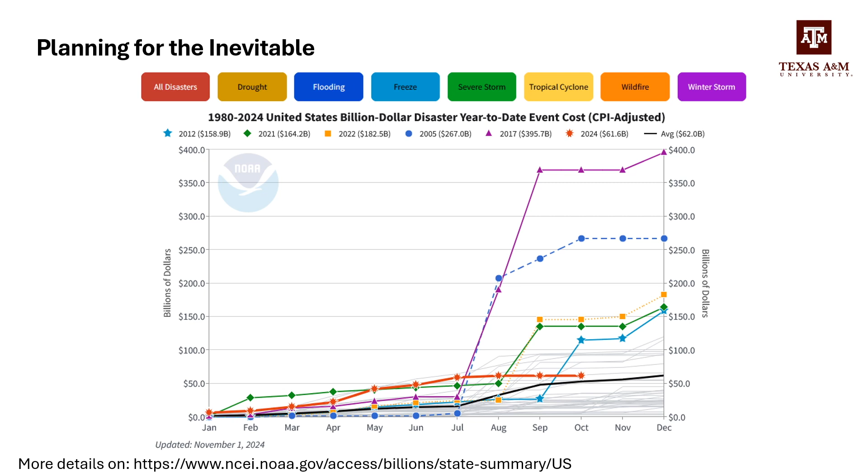This is largely driven by a combination of factors: population growth, urban development in highly vulnerable areas, but also climate change, because climate change intensifies these extreme events.

Given that our focus is on industrial processes and the impact of disruptions, if you consider a region like the Gulf Coast, which is home to numerous industrial and manufacturing facilities, this is home to close to 50% of total petroleum refining capacity, as well as 50% of total natural gas processing plant capacity.

The reported economic losses exceed $550 billion, but it doesn't really capture the full extent of devastation when it comes to the environment and to society.

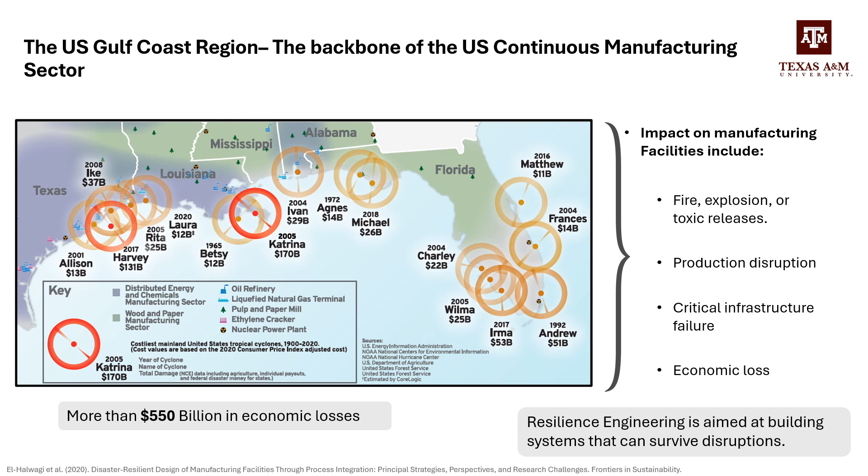Now, these disruptions are always going to happen one way or another, and the primary reason is how interconnected and interdependent our world and industries are. Something happening in a distant part of the world will ripple and find its way to your city or business or industry in general.

Now, these interdependencies have been studied extensively, specifically in the critical infrastructure domain, and this is where I borrowed the chart you see on the right. They are mainly categorized into physical interdependencies, so you can think about the material exchange between two entities or facilities. For instance, in the chart, you can see natural gas supplying a power plant with fuel for generators. There's also cyber interdependencies, anything that involves the exchange of information.

You can also think about geographical interdependency, so maybe there's no physical or cyber interdependency, but there's a proximity of systems. This leads to the fourth category, which is logical interdependencies, where you can infer a relationship. For example, you can be in a country where some regulatory or policy change

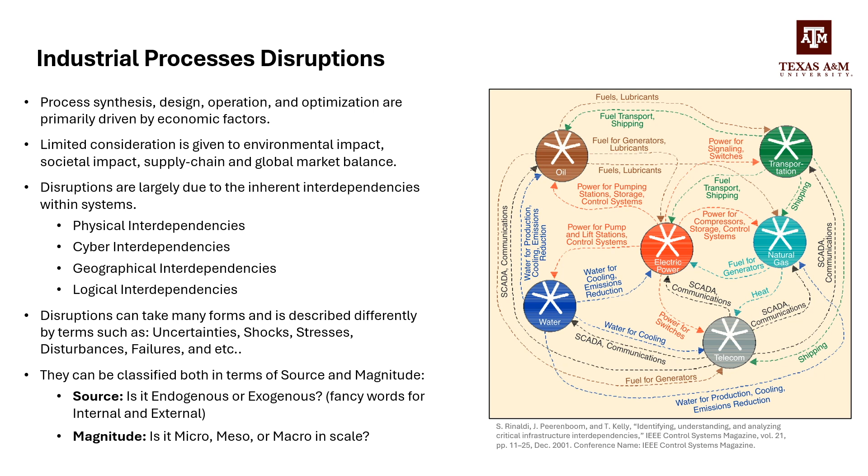So resilience, which is a concept and can be described as a property of systems, is really multifaceted and multidisciplinary. You can look at it from an etymology perspective, or from a modern usage perspective, which usually defines resilience as the ability to cope with stress. But you'll find different definitions depending on the context or discipline you're examining, and resilience theory seeks to give a unified framework.

However, the concept is deemed by many as somewhat abstract, elusive, ambiguous, and because it depends on the system itself, like the system ontology depends on how you define the system boundaries, and whether your system has the ability to self-organize, it makes it really hard to give one universal definition.

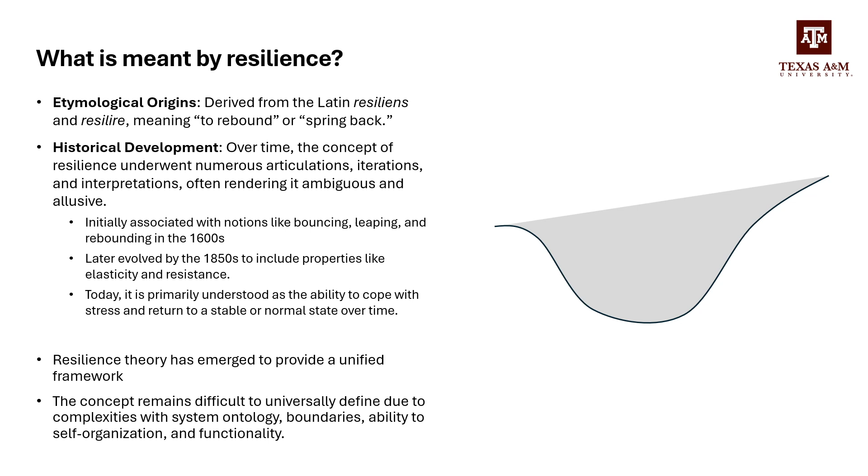However, one of the important things in the resilience literature is that it is visually represented through what is known as a bathtub curve. In the bathtub curve, you have the x-axis as time, and on the y-axis some performance metric that reflects the overall health of your system, be that production capacity or maybe revenue from sales.

So you can imagine your process or system is working as intended, and then something bad happens which causes your system to fail partially. You can think about this disruption as, for instance, a major equipment failure. Then naturally, there will be a response from the operational team to restore the process, and this will take time until the process is returned to normal operation.

Now, the dip or depth of this bathtub highlights how resilient your overall system is. Of course, it's not necessary to restore the performance to the original level, so it can be a repurposed performance that could be higher or lower than the original one, and it can also be allowed to fail safely if that's the case.

You can categorize phases around this disruptive event into three phases: a pre-disruption phase, a post-disruption phase, and whatever is in between, where your operation is not working as planned due to the disruptive event. The bathtub curve is a great way to show the life cycle of a system.

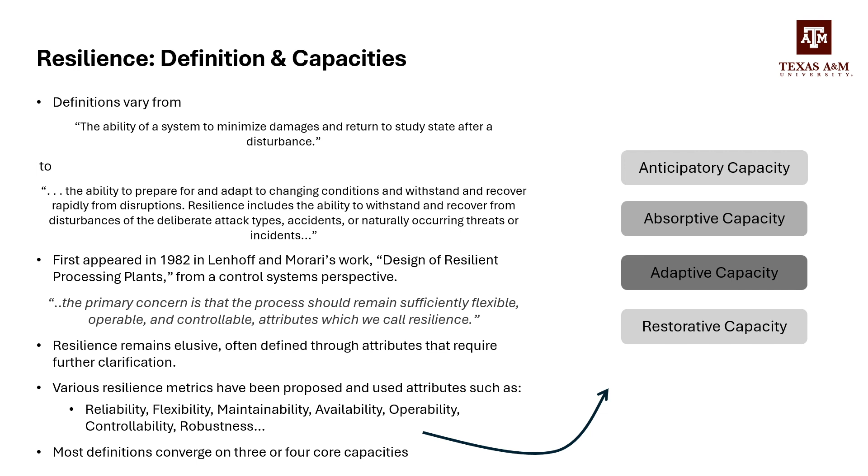If you look at the bathtub curve, we can see these capacities during the different phases. In the pre-disruption phase, we can anticipate potential upsets. This can be early on during the conceptual design phase or during a retrofit phase. What this really means is that in this phase, we can be proactive and have proactive strategies to prepare for potential disruptions.

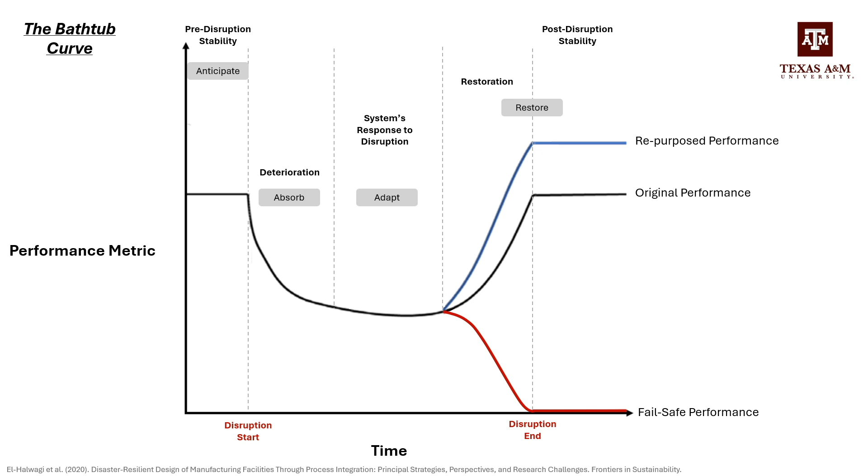Then when a disruptive event happens, the system should not fail immediately. In other words, it should absorb shocks. Then it should be controllable and can adapt to the changing conditions. In these two phases, you can also employ concurrent resilience strategies that focus on maintaining functionality during the disruption phase. Then, reactive strategies are implemented in the post-disruption phase to restore the system to a stable state.

So now that we know a little bit about resilience, how do we include it in the design of industrial processes, whether during the conceptual design phase or during the retrofitting phase? Noting that the inclusion of resilience is really most impactful when addressed early on, where you have more degrees of freedom, as compared to the retrofitting phase, where technical difficulties along with financial ones usually arise.

This way of thinking, including resilience early on, parallels the concept of inherently safer design, where safety is considered from the outset. Some of the charts I've shown till now are borrowed from Dr. El-Halwagi's paper, in which he suggested 12 disaster resilience principle strategies to enhance the resilience of manufacturing facilities. I have it on the last slide under suggested readings, but you can see the 12 strategies here, and you'll find more details and examples when you go through the paper, which I encourage you to do.

To take one example, let's look at the repurposability strategy, where it simply refers to the capability of a process to be repurposed to produce different products from the original intended ones. You can look at, for instance, the block flow diagram that shows natural gas and oxygen being used to synthesize methanol. Now, as many of you witnessed during the pandemic, the demand for hand sanitizers went up the roof.

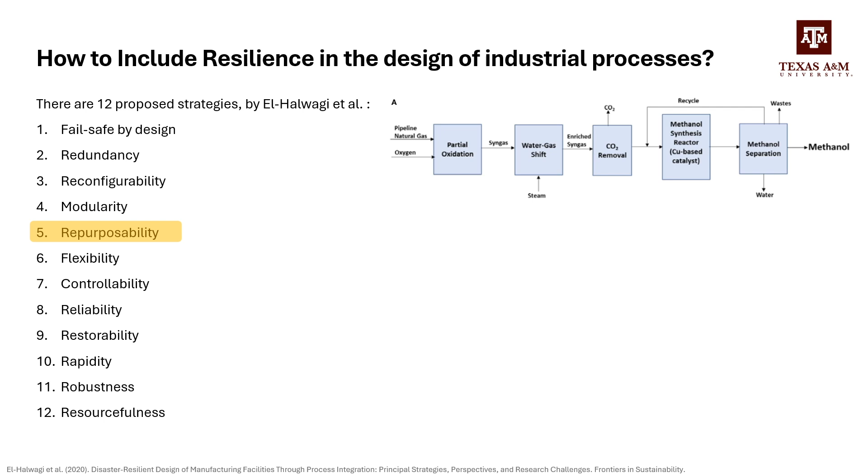One question that may come to mind: can methanol be used in some way to manufacture hand sanitizers? Well, the answer is yes, but how? The process of methanol can be repurposed, given certain requirements or constraints being met, to produce ethanol, which can be used to manufacture hand sanitizers. If you look at the second block flow diagram, the process is almost identical, except for the apparent change in catalyst.

Of course, there will be changes in terms of vessel capacities and some other design parameters, but the idea that the methanol process may be repurposed to produce a different product is worth considering during the conceptual design phase, where one of the steps is usually looking at the different processes and evaluating them. Being resilient aware will highlight such processes.

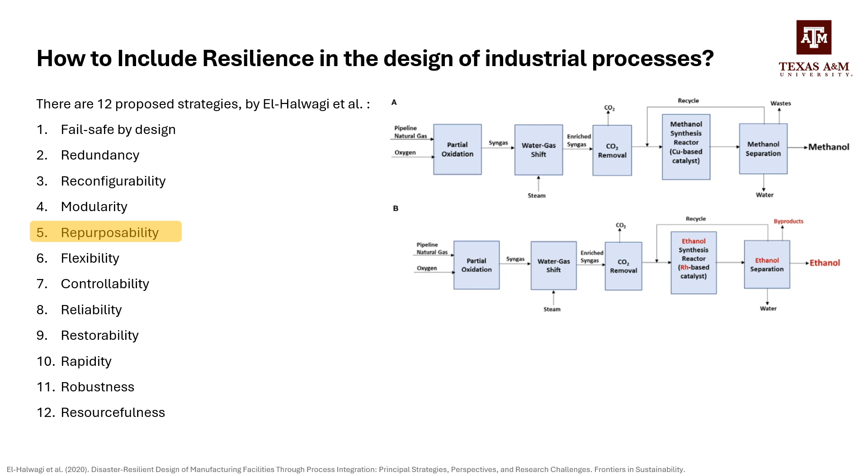You can also see an example that actually happened back in 2020, where some wine and beer distilleries repurposed their process to manufacture hand sanitizers for their local communities.

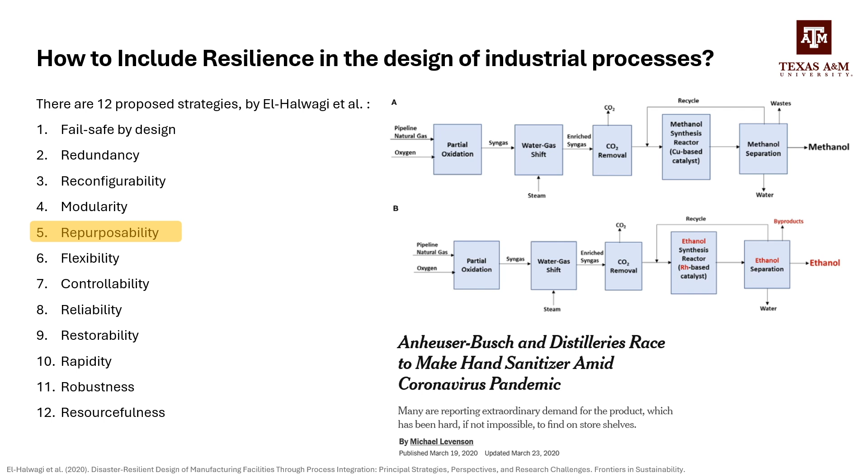So we talked about resilience, what it is, and we highlighted that it's important to be aware of disruptions that arise from unavoidable interdependencies, and how important it is to include resilience in the conceptual design phase, just being resilient aware. One interesting example is industrial symbiosis, which, from the name, draws inspiration from nature, like many other innovations. Just to refresh your memory, symbiosis is basically any beneficial mutualistic relationship between two entities.

One example of mutualistic symbiosis can be seen between the oxpecker and the impala, where the oxpecker feeds on parasites and ticks found on the impala, while simultaneously improving the impala's health, because these ticks and parasites feed on its blood, which would make its health deteriorate if it weren't for the oxpecker.

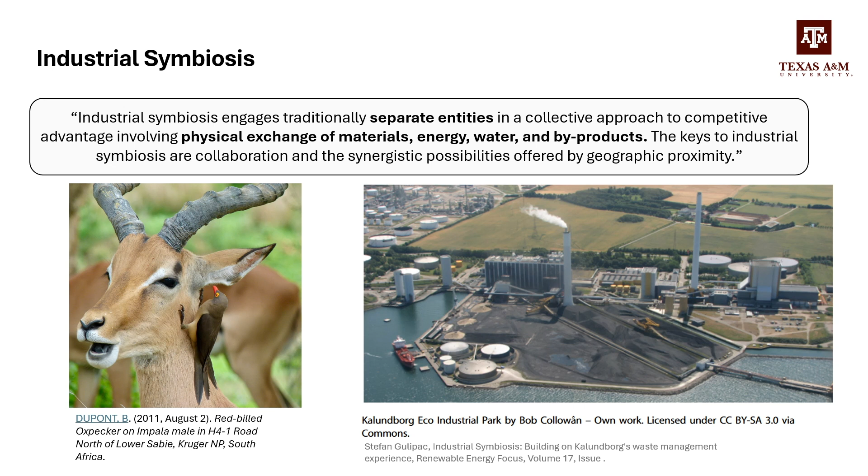This relationship is mirrored in industry, where separate entities engage in a collective approach through the exchange of materials, energy, water, and byproducts. You can see this in one of the well-known industrial symbiosis networks, also termed eco-industrial parks, in Denmark, showing the industries involved and the type of exchanges they engage in.

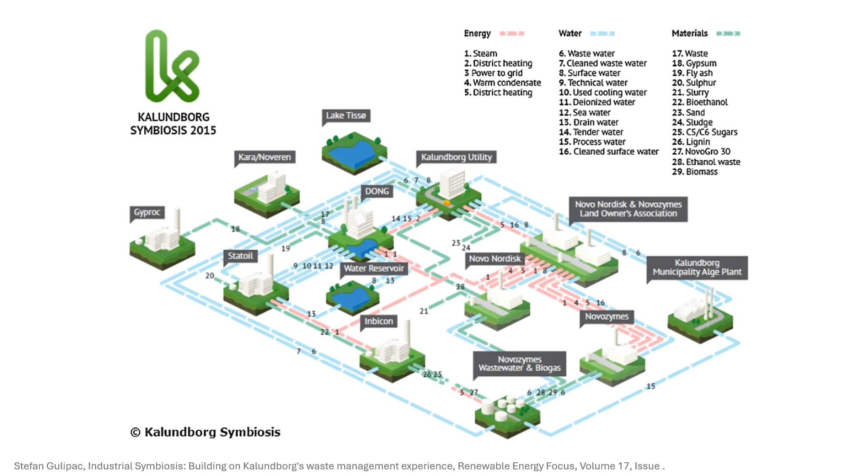You can find similar examples across the globe, including in the United States, South Korea, China, and various parts of Europe. You'll find eco-industrial parks, or industrial symbiosis networks generally, that have more than a thousand facilities exchanging products of all sorts.

Here you can see an example of an intriguing conceptual model for an industrial symbiosis network: the carbon, hydrogen, oxygen symbiosis network. As the name suggests, the exchange components primarily contain carbon, hydrogen, and oxygen. What sets this model apart is its introduction of an interception network, which includes interceptor units. These units go beyond the simple material exchange found in many existing eco-industrial parks by transforming, mixing, and separating components to meet the specific demands of participating facilities.

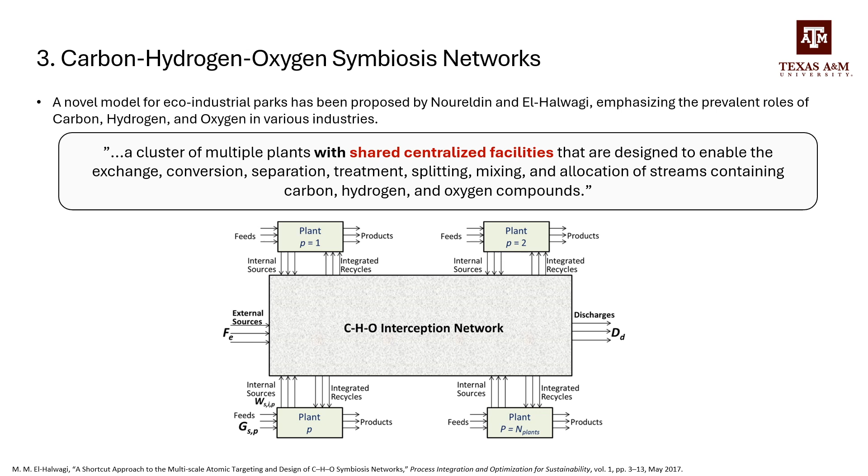For instance, if a plant requires methanol and none of the other facilities can supply it directly, then an interceptor unit, such as a methanol synthesis unit, can produce it to fulfill the need.

All industrial symbiosis networks, exemplified by existing industrial parks or eco-industrial parks, are driven by profitability like any other business or industry. However, this is achieved by sharing infrastructure that allows maximizing resource efficiency or resource utilization, while reducing environmental impact and delivering societal benefits. So this idea of co-locating and maximizing resource utilization for economic advantages is appealing. However, it does come with a cost of being highly dependent on other participants to operate.

The reason I took this detour to discuss industrial symbiosis is that I find it fascinating, and also it's a microcosmic representation of the global interconnectedness we live in. It's like a condensed model of how the world's interconnections function. You can see the effects ripple through the systems at a much faster rate.

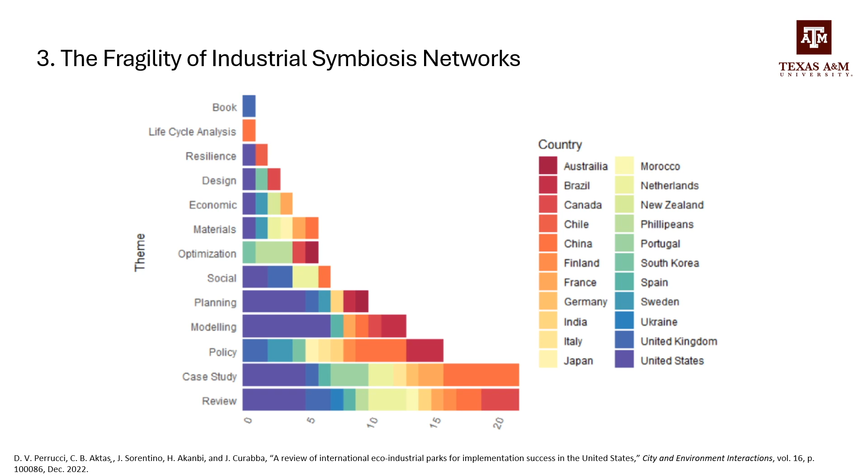Also, part of my reasons is that this is what I worked on during my master's thesis, which we will see on the next slide.

So the case study is to examine the resilience of a carbon-hydrogen-oxygen symbiosis network, which was synthesized based on economic metrics. But the overall framework can include any type of network that can be represented in a node-arc representation, which is all what networks reduce to.

You either start with an existing network implementation, or you use targeting techniques or mathematical programming—two techniques covered, I think, in chapter 11 of Dr. El-Halwagi's book. You use these to synthesize a network based on a postulated set of available resources and desired targets. Then the synthesized network will consist of nodes and arcs.

The nodes represent facilities and plants. The transportation arcs can represent streams, for instance, or shipping routes. Then after doing so, we assign a degree of dependence between two nodes, which is basically a percentage showing how a receiving node's output is affected by a disruption on the sender's node.

In other words, if node A gives node B 1,000 units of something, and node B is 10% dependent on node A, then node B's output will be reduced by 10%. You can see the propagation mechanism in the top right corner.

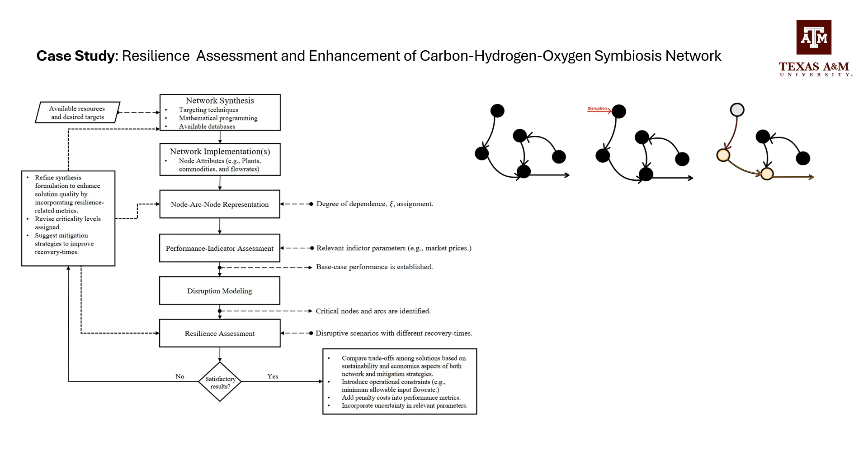Then in disruption modeling, each node in the network is disrupted individually, and we see the effects after the disruption happens—in other words, after the failure is propagated through the network—and then we can identify the critical nodes and arcs. The last step in terms of assessment is postulating different recovery strategies so that we can calculate resilience.

Now, of course, after doing so, if the result is satisfactory, in other words, you deem the network to be sufficiently resilient, then there are other trade-offs you can consider. You can make the analysis more rigorous, and you can enhance the overall analysis. If the network is not resilient, then you can go back and refine, for instance, the synthesis formulation.

So we talked about how we synthesize the network in targeting techniques or mathematical programming. You can choose different metrics other than the economic metric. You can choose something that reflects resilience, if you can express it mathematically. And you can synthesize new networks, and then you can examine the resilience, or you can revise the degree of dependence that you assign between the nodes.

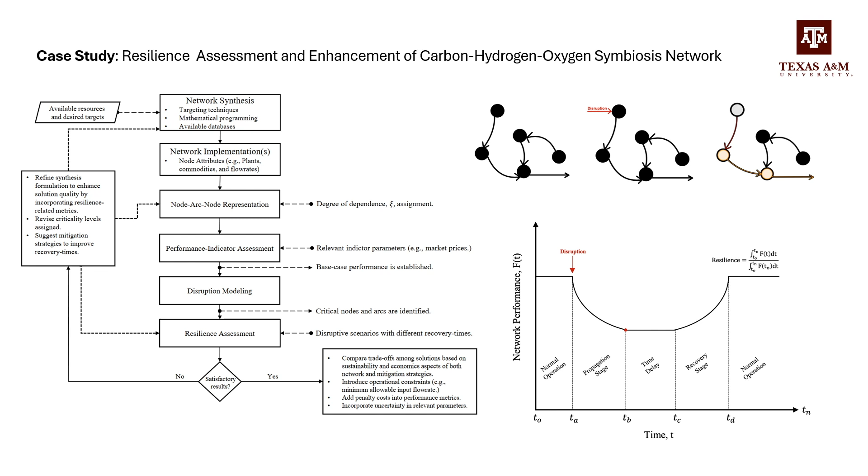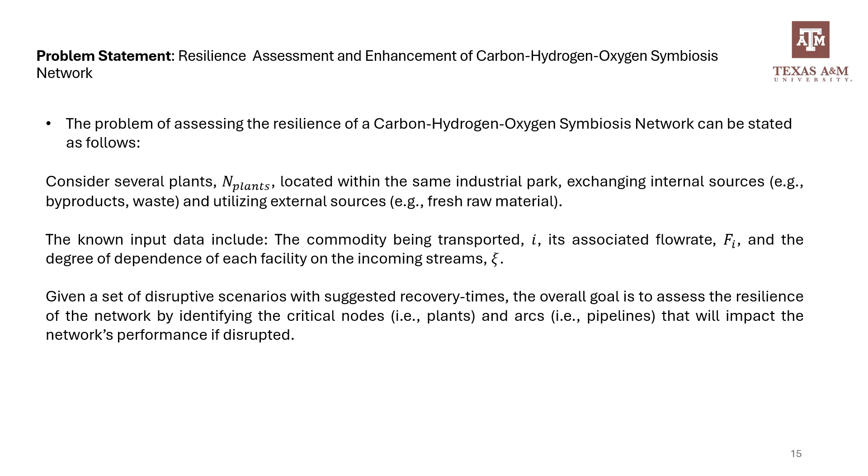So here we can see the problem statement. We basically have several plants located within the same industrial parks. They have some internal sources they want to exchange, and they also utilize external sources. We know the commodity being transported, the associated flow rates, and the degree of dependence of each facility on the incoming stream. We want to know or assess the resilience of the network.

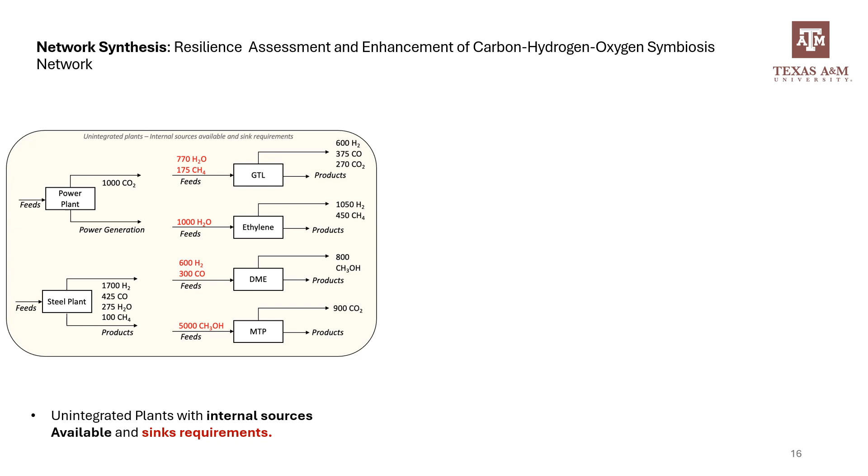So starting with a postulated set of industrial plants that have internal sources that are available for integration, and also some requirements, meaning components they need to operate. So we have a power plant, a steel plant, we have a gas to liquid plant, an ethylene production plant, dimethyl ether plant, and methanol to propylene plant. And what's in red is basically the sink requirements, and what's in black is the internal sources that are available for integration, and all of them are in kmols per hour.

Then we synthesized a network based on targeting techniques. And you can see the original set of plants, but you also see a separation and mixing hub and also interception units. In our case, a methanol synthesis unit, a steam reforming unit, and a water gas shift reaction unit.

Then, so now we know the sending and receiving nodes. We know the type of commodity. We can assign a degree of dependence based on different factors. And what's going to happen now is that each node is going to be disrupted. Failure will propagate. The effects will be calculated, and then we can identify which nodes are more critical than others.

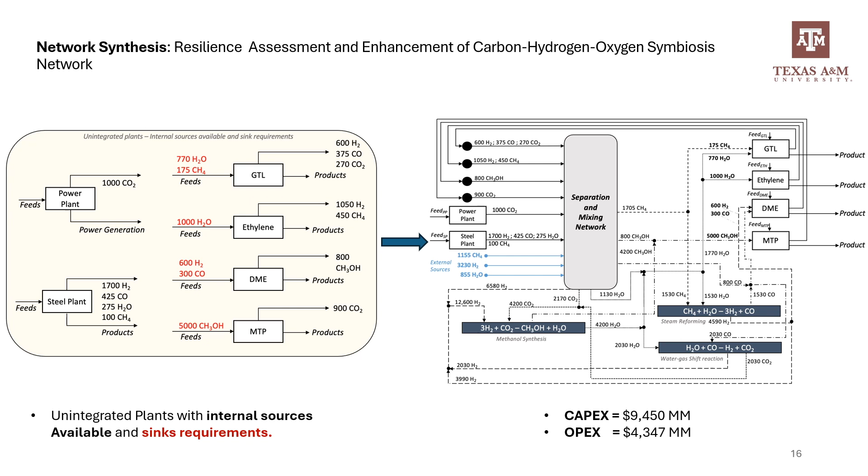So looking at these two plots, we can see the nodes on the left-hand side or on the left chart, and the right chart shows the arcs. And it shows which nodes are most critical than others. And in our case, we can, for instance, see that the ethylene production plant and the natural gas supply stream are the critical node and arc respectively.

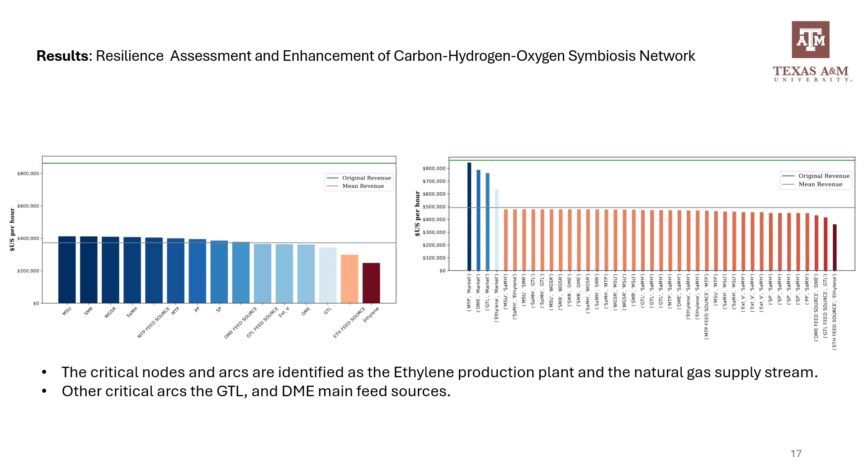So after identifying a critical node or a critical arc, we can postulate different recovery strategies, and we can see three different sets of outcomes in which resilience is highly reduced with more delayed response. And what this analysis really serves as is a preliminary view of worst case scenario, and it doesn't address the nature of the disruption. In other words, we're being agnostic about it.

However, it allows us to further zoom in to a specific critical node. So in this case, the ethylene production plant, and if you go through the literature and research, you'll find many common internal disruptions that cause major shutdowns, and then you can imagine.

So, for instance, in the case of ethylene production plant, you have frequent malfunctions in the compression section. So you can imagine this ethylene plant being in a highly integrated, intensive network. Failure will propagate and will cause major economic losses, not only for the company that operates this ethylene plant, but also for the other participants.

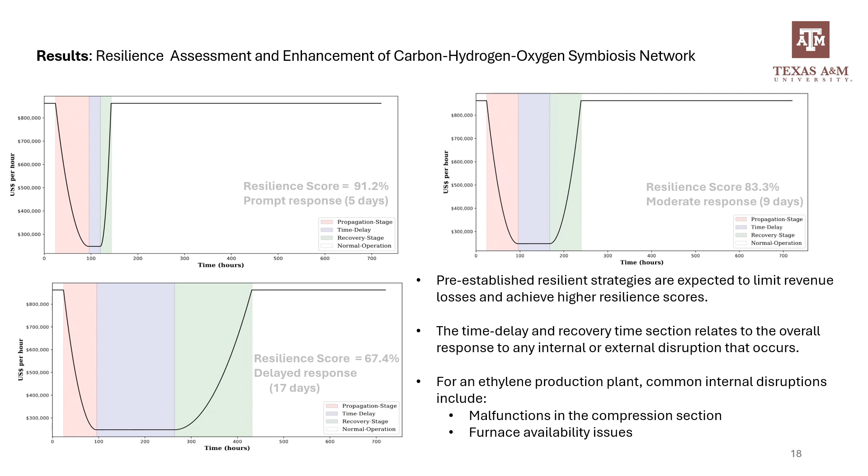And I guess an important concluding remark is to always be resilient aware. And I mean, we're surrounded by uncertainty, not certainty. So try incorporating uncertainty and resilience into your framework so that you're always reasonably hedging against it, and you're able to bounce or spring back after upsets.

In terms of suggested readings, I suggest going through the first two papers if you're interested in resilience. The third paper is good if you want to know more about the existing eco-industrial parks internationally and the prospects of implementing some more in the United States.